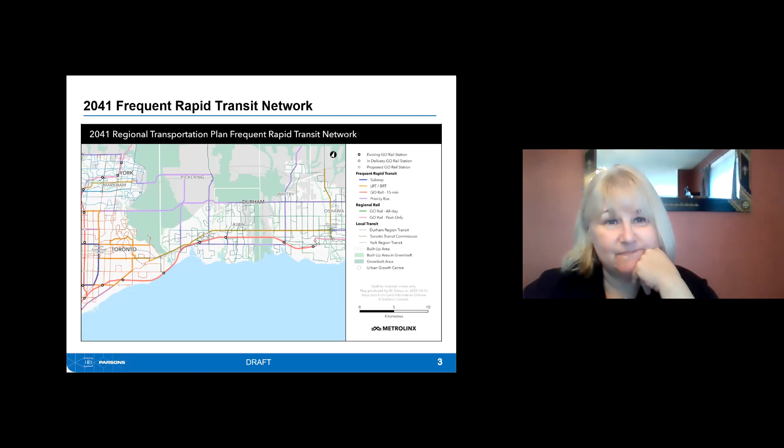This project is part of what is known as the 2041 Frequent Rapid Transit Network, which is part of Metrolinx's plan to provide a holistic solution to the entire region. There are a number of elements in the east part of the plan, including this particular project, the extension of the GO train planned out to Bowmanville, a future BRT or LRT corridor up Simcoe Street in Oshawa to serve the Technical University, and plans for higher order bus priority on Taunton Road and other north-south corridors. This is an integrated plan agreed to by all of the region, and Metrolinx is now taking it one piece at a time and moving it forward. This is one of the ones in the East End moving forward first.

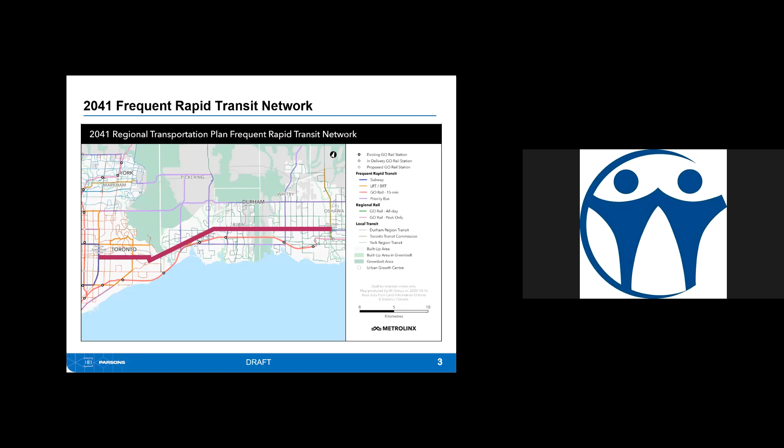We start at Scarborough Centre, connecting to the large employment node there, as well as to the future Scarborough subway and the SRT. Coming out Ellesmere Avenue past the University of Toronto Scarborough campus, and then out the Highway 2 corridor.

As we zoom in a little, we can see the reason we're doing this: this corridor connects downtown Oshawa, downtown Whitby, Pickering Village, downtown Pickering, as well as a number of educational institutions, major shopping centers, and some large retail, residential and office developments. So there is a lot of travel along this corridor where people could take transit if it were more available.

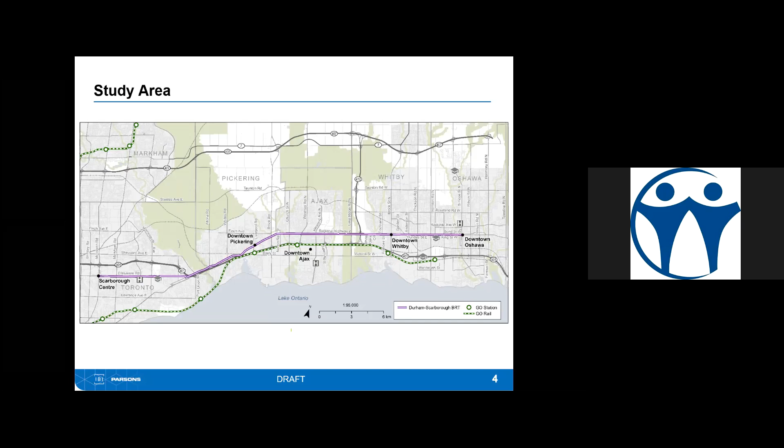We've also found that with the Durham Pulse service that's out there, we've seen a great uptick in ridership. The route today, the 900 service, which follows this corridor, is the most heavily traveled in Durham region today, carrying more than 3 million passengers a year. So we know there is the demand out here, and we're looking to improve the service to give people more options.

To give you a bit of an overview of the project - we were chatting about this before the presentation started - these projects take a long time to come from fruition to operation. This actually dates back as far as 2008 as part of Metrolinx's Big Move. Durham Pulse was launched in 2013 and has shown to be successful. Through 2017, 18, and 19, a number of other studies have come out that tie all of this work together with the master plans and official plans for each of the municipalities in the region.

We are now most of the way through our preliminary design process and working towards the environmental project, which I'll get to in just a second. After we have environmental approval at the end of the year, we'll then move forward into detailed design, procurement, and then into construction and delivery.

So we're a fair ways into this project, but there will be probably 6 to 10 years of construction. Not everywhere will be under construction for that full time - each area will likely be under construction for 1, possibly 2 seasons, but we'll start in different parts of the corridor and then fill in the key gaps and work to join the whole system together.

As an overview of the actual TPAP, or the Transit Project Assessment Process - the complicated provincial name for a class environmental assessment - it's divided into 2 phases. The first is the pre-planning, where we do all of our background studies, look at alternatives, go through most of our consultation, assess the impacts and mitigations, do our preliminary engineering, and draft up a report.

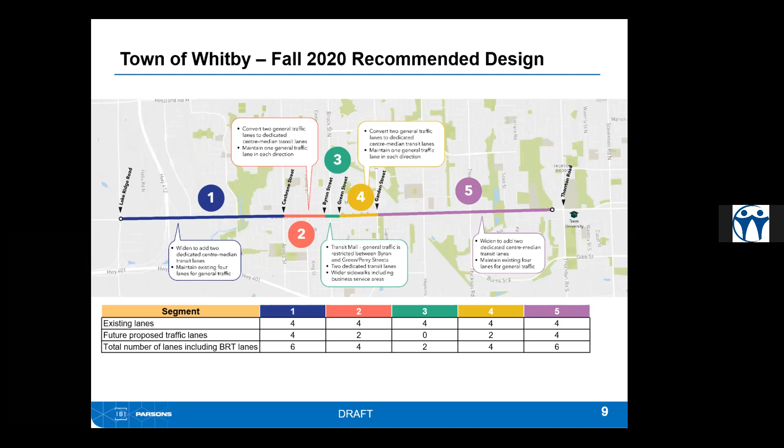East of Garden Street and out to the border, just west of Thornton, we're looking at ultimately widening the road from 4 lanes to 6 to put the BRT in the middle with 4 lanes of general traffic. There are a number of constraints to doing this. Obviously, the CP rail bridge is one of the big ones, and we are looking ultimately to replace that bridge. What that may mean is the section between Anderson and Garden is delayed further out in the process until we can get agreement with CP on how to replace that bridge. And then the downtown core in Zone 3 we'll get to a little bit further on in the presentation.

So coming down to street level and looking at what this would look like at Dundas and Fothergill, we see a 6-lane roadway. We have a central raised median with bus lanes on either side. Then we have 2 lanes of general traffic, both eastbound and westbound. And we also have sidewalks and cycling facilities on both sides of the road.

The intention in building the transit up is not just to facilitate people riding the bus, but to facilitate people getting to and from the bus. So we want to fill in any gaps that there are in the sidewalk network and in the cycling network to encourage active transportation around the transit system.

At the stops, we'll see in a minute, the design of the stops will be in these sections, will be out in the median of the road, much like they are on the Viva system along Highway 7 in York Region. And each stop will be accessed at a signalized intersection to make sure it's safe for people to get to and from the stops.

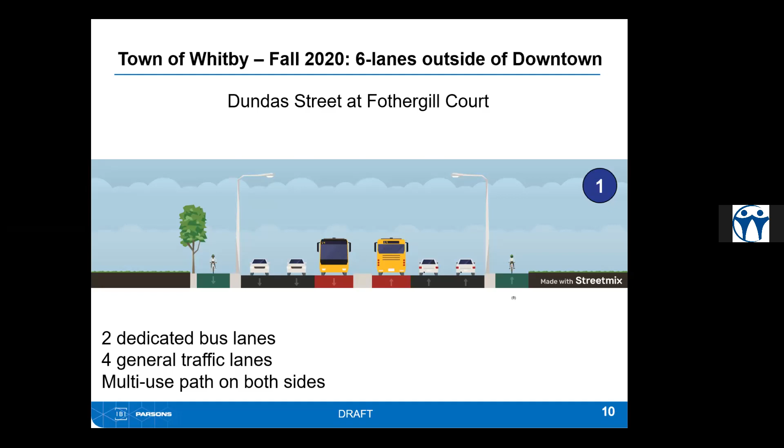As I mentioned, ultimately this is being recommended for the stretch of Dundas Street west of Annes/Cochrane and east of Garden Street. What we're doing here is making sure that we provide traffic capacity for the volumes that we're predicting for 2041. We are taking into account developments that are being planned nearby. We've looked at the official plan road right-of-way that's protected for. We're also looking at how we can minimize any impact on heritage resources and cultural heritage resources. So we have done a full suite of environmental studies, and we're taking those into account as our design moves forward.

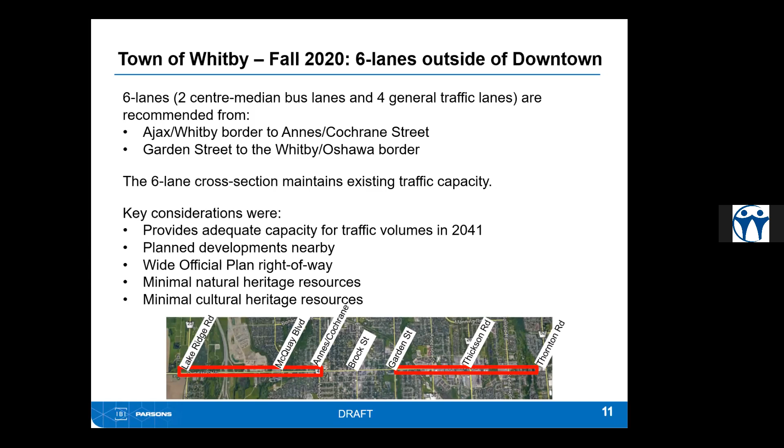The reason we're looking at 6 lanes in the outer area: if we start in the west end, today there's about 1,400 vehicles per hour in each direction during rush hour. A single lane of traffic can really only handle about 850 cars, so there are actually more cars out there than can be carried on a single lane of traffic. We also see that by 2041, with the growth in Durham Region, which is actually the highest of any region in the Greater Toronto Area, we expect that traffic will grow by more than 20%. That will be able to be carried on 2 lanes of traffic, but with only a single lane would lead to a lot of neighborhood infiltration.

With the dedicated bus facility all the way across the region, we're expecting that volumes will increase to somewhere between 1,600 and 1,800 per hour in each direction. That actually is equivalent to more than 1 lane of traffic and pretty close to 2 lanes of traffic, so it also allows for future growth. A BRT like this could handle upwards of 3,000 or 4,000 people an hour, so that does provide us with good capacity to gently change people's behavior to move more and more to public transit as growth happens and congestion increases.

Similarly, on the east side, we have a slightly lower traffic volume. It's in the 800 to 1,400 per hour range, and we see the transit usage will also be slightly lower, in the 1,000 to 1,500 passengers per hour per direction, but still more than can be carried in one lane of traffic.

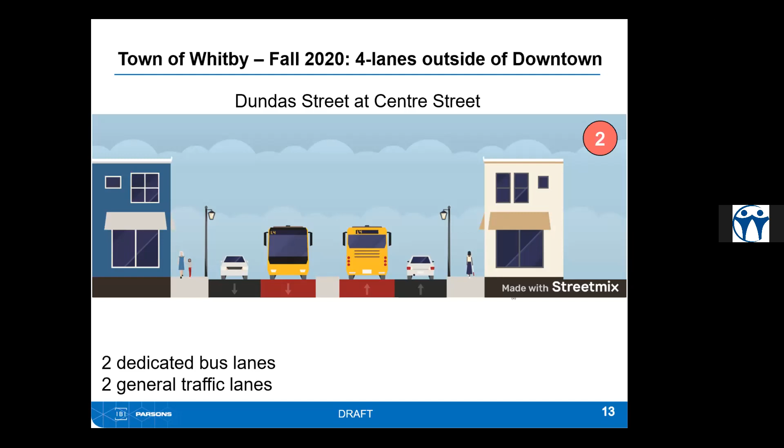As we get closer in and we have the older buildings close to the sidewalk, particularly the retail spaces, like we see here at Centre Street, the design is to maintain the existing curbs and repurpose the two median lanes for buses. We'd have to do some local widening where we have stops, for instance at Henry Street, at Euclid, and at Hickory, so we'd bump out slightly in those particular spots. Here again, the traffic volumes are slightly lower, and we believe the 4 lanes does provide good accessibility.

So the recommendation is to carry the 4-lane option from Cochrane as far east as Byron, and from Green Street as far east as Garden. The reason we can do this is there's a regular grid street pattern in the historic downtown, which is one of the most excellent ways to move people around. In fact, cities with regular grids of streets, like downtown Whitby, see far less traffic congestion than cities like Boston, where the streets are on a much more curvilinear pattern.

There's also a fairly narrow road right of way, so the impact of widening to 6 lanes would not be acceptable to the local community. A number of buildings are very close to the property line, and as we get closer to downtown, there are more cultural heritage resources that we need to protect.

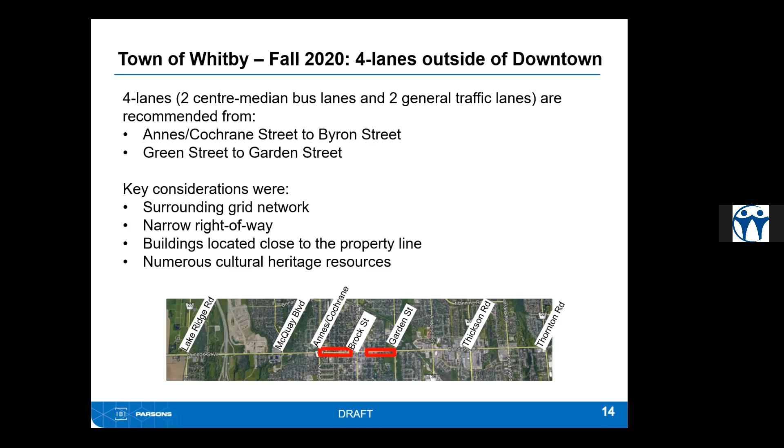Now, one of the things we realize is that by introducing BRT and having a median down the middle of the road, that will change the way people travel. So like you may have seen on Highway 7, the intent here is to consolidate turns—people needing to turn in and out of local side streets and driveways would be reduced to right-in, right-out only.

If you're coming westbound, instead of turning left into the local side street, you would go to the next traffic signal and be allowed to make a U-turn along with a left turn phase on a dedicated phase, to come around and back into the driveway. Similarly, if coming eastbound and into that side street, you could turn out, go to the next intersection, make a U-turn and head back.

So this is actually in alignment with Vision Zero. Where we look at widening roads to 6 lanes, we're looking at introducing a median regardless of whether there are BRT lanes, just to improve safety. Our traffic analysis has taken into account that we'll see extra volumes making the left turns and U-turns at these intersections, and we believe that all works.

This will also require large trucks to change their routes, so that will be communicated out to the trucking industry and included in online tools like Google Maps, so people know where they can go. We do know that ambulances and smaller trucks will still be able to make the U-turn. It's only when we get to large tractor trailers that they won't be able to, and they'll have to find a different route to service businesses.

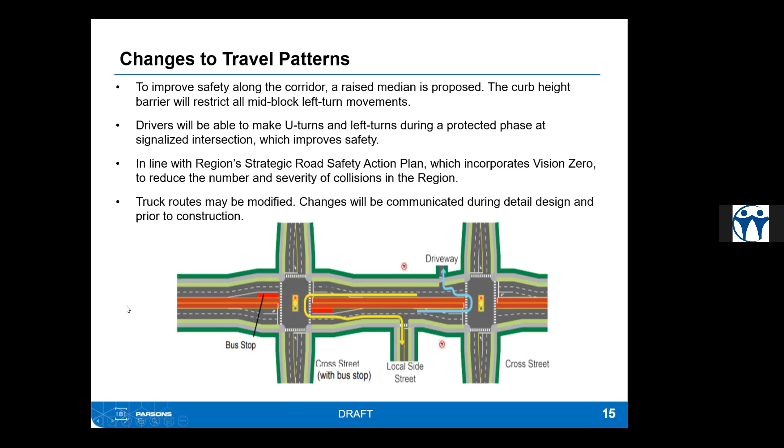So I wanted to show this video prepared by York Region Rapid Transit, to show people how the buses, the traffic, and the pedestrians function. I'm just going to click on the link here and we'll run this short video to see how that functions.

And it'll just pop up here in a second, I hope. Here we go.

Just takes a minute to load here. We found on York Region that this is very safe for pedestrians. They always cross at signalized intersections.

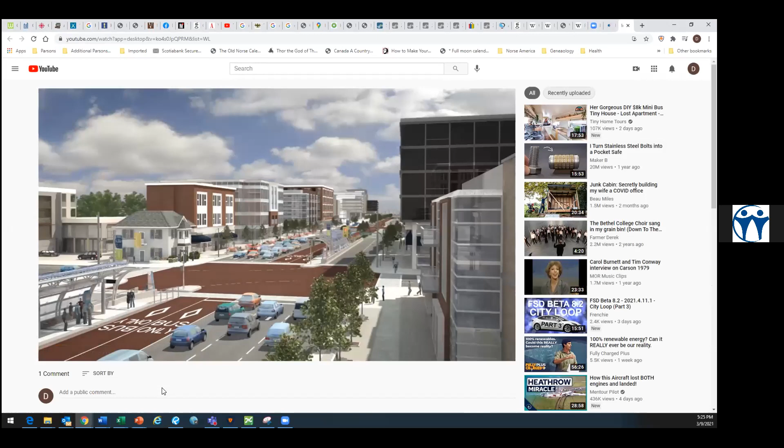You can see here the left turning traffic, left turn and U-turns get a green phase while the buses are stopped. Once the U-turn and left turn traffic is cleared, we then see a green light for the eastbound and westbound traffic along with the buses.

The buses will stop at the far side stop for boarding and alighting of passengers at a dedicated facility with off-board fare collection and amenities for passengers waiting. That helps speed up the boarding and alighting process. It also allows the buses to move forward once they've done all their boarding and alighting without having to wait for the light.

When the light changes, pedestrians will cross to and from the island to get to the bus stop or to come from the bus. There's also a refuge in the middle of the road so that if people need more time to cross the street, they can cross in two stages. There'll also be a push button there to call your pedestrian walk signal.

So this has been very successful in terms of making it a very easy way to get around and to use the system.

There is a timely question, so I thought I would introduce it. It's from Brian Ruck. The question is, how will the conflicts between U-turns and right turns be handled, as this is often a significant collision concern at these types of intersections?

That's a good question. We are making sure that in a lot of the areas we have two receiving lanes, so you should be able to make the U-turn into the inside lane, and the right turning cars would use the outside lane. We will be looking to make sure that's also a behavior that is learned quite quickly. We found on Highway 7 that people understand the left turns because they've seen signs. We may also look at putting some right turn restrictions, no right turn on red, if we find there are either visibility issues or a particular safety issue that arises. But we've found ways to manage it on the other system.

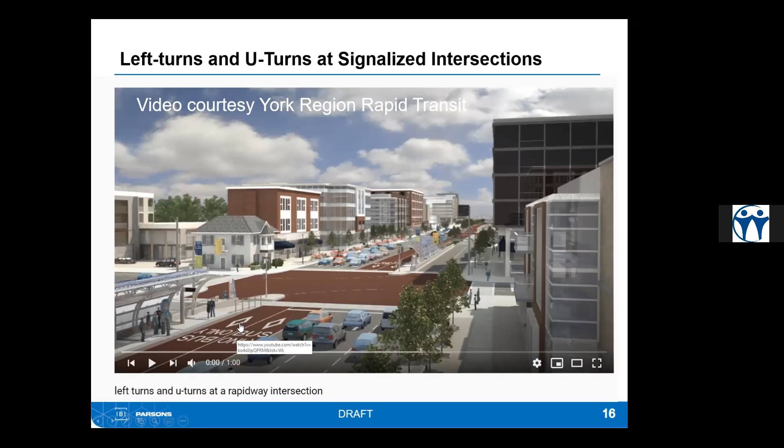As I mentioned off the top, one of the reasons we're looking at this corridor is there is a lot of growth planned. There are a number of dedicated, designated future growth areas in the three downtowns. Pickering has been working on a new downtown plan as well, centered around the route. So not only is there a development plan, but there's all kinds of development.

This allows people to both live and work in the corridor. People can connect from north-south bus routes and make good connections at all the stops to continue their journey along the corridor. We see great potential with this service to increase the number of transit-oriented developments, and make sure we can handle everybody who wants to live, work, and play in this community.

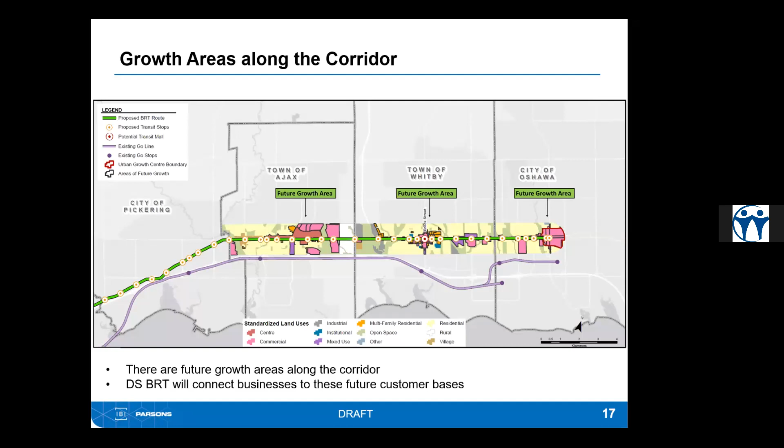Some of the concerns we've heard are about the right in, right out access and the walkability of a six-lane roadway. We do have to remove some trees to build this, and there is a tree compensation plan planned as part of this. We've taken opportunities to improve active transportation to heart, and not only is this entire service fully accessible, but the intent is to fill in all the gaps in the sidewalk and cycling networks.

We are looking to increase business accessibility for employees in particular by giving them more opportunities to come by transit, as well as people coming to your businesses. We see that the service does provide the opportunity to bring more people and more business along the corridor.

We have been discussing with CP Rail about replacing the bridge so that we can get the six lanes in, and they have agreed that they will work with us to do this. This will provide space to fill in another gap, which right now is a very narrow sidewalk that follows underneath the CP Rail corridor, so we will be able to have both sidewalks and cycling facilities through there.

So I think before we jump into the downtown section, I want to turn it back to Glenn, or to Natalie, and see if there are any questions about the outside of the downtown area that we can address before we move on.

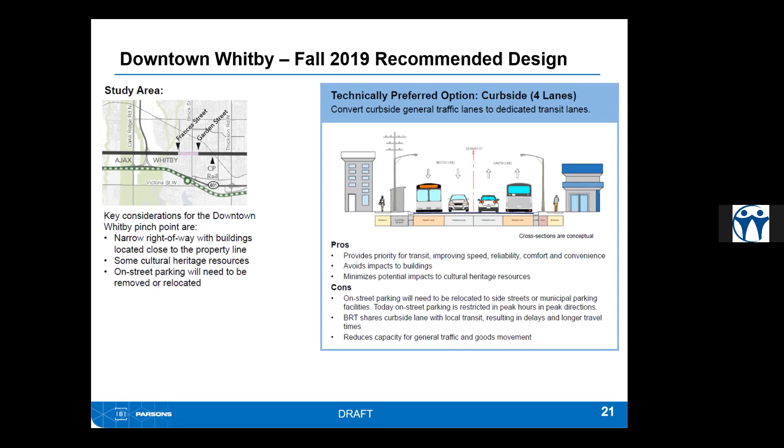The challenge with this, though, is that on-street parking would need to be relocated. There would be a challenge with deliveries, particularly in the peak hours, because there would be no access to the curb, so deliveries would have to happen from side streets or from rear accesses. And with the buses being in the right-hand lane, any turns in and out of driveways and local side streets or left turns across introduces conflicting traffic with the buses, which takes away some of the reliability.

So what we heard was there were concerns about the on-street parking being moved. There were concerns about general traffic impacts. There was concern about the ridership and whether there were enough riders to justify it. And there was a major concern about there not being any improvements to the streetscape downtown.

So some suggestions that we took back were to look at considering one-way traffic through downtown. We looked at a number of different options for that. We looked at where we could find space for wider sidewalks and additional pedestrian crossings. And we also went as far as looking at whether or not in the downtown we could go to a transit and pedestrian mall where there would be no general traffic, but only transit and pedestrians.

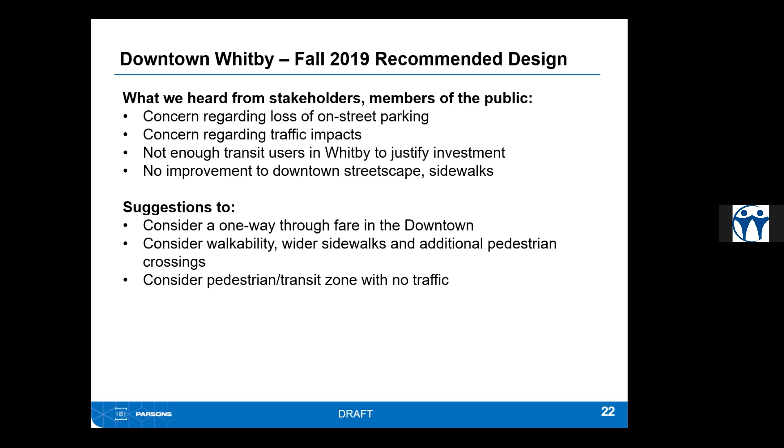So that was the design we came forward with last fall. The idea here was to convert the 2 curb lanes to wider sidewalks, so we would more than double the width of the sidewalks, and we would leave the 2 center lanes for BRT.

We see that this will see a good uptake in ridership. Today, there are about 900 people who board and alight per day through the central area, and about 900 people per hour riding the bus eastbound and westbound. In 2041, we see those numbers will double to around 1,500 to 1,800 boardings and alightings, and about 1,500 people per hour in each direction. So we see a pretty healthy increase in ridership as we move through here.

We proposed this to run on Dundas from Byron to Perry Street, with about 1 block on either side of Brock where we would have this facility. That also allows us to integrate the stop for westbound on the west side of Brock and eastbound on the east side of Brock into this wider pedestrian realm.

There was also a benefit that with the wider sidewalks, they could be graded slightly differently, so we might be able to ramp up to the doors of businesses to help improve accessibility and get rid of the steps at the doors. That's a challenge today because any ramp sticks too far out into the sidewalk.

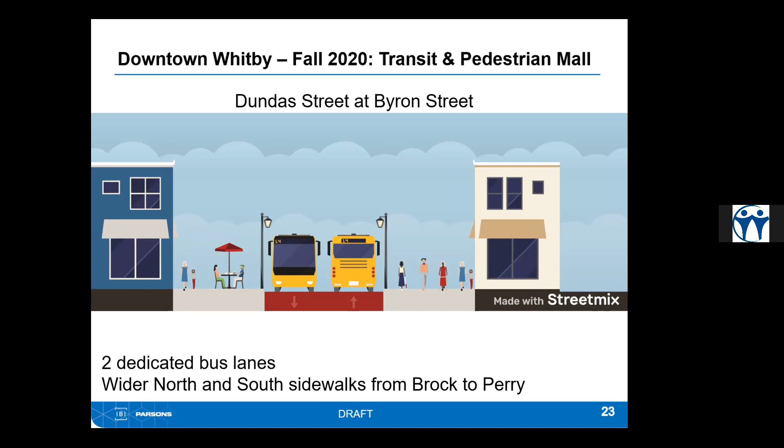So potentially this is what it could look like. We see the sidewalk has been widened significantly, with the potential for patio dining and a lot more activity. We also see the opportunity in set locations to allow delivery vehicles to come in and pull up onto the wider sidewalk, particularly in off-peak hours, to service the local businesses.

So while we would lose the on-street parking, it would be relocated very nearby. We found a spot at Elm and Byron where we can replace almost all of the parking. We would still allow deliveries, and of course emergency vehicles would also be allowed to come through here to get across the downtown area. So we felt this was a good balance.

It provides a high degree of transit priority, a much improved pedestrian realm on both sides of the street, and there are ways for traffic to get around the area and still serve the businesses.

So when we first brought this forward, there was concern about some of the impact on the businesses, the loss of parking, the potential for neighborhood traffic infiltration, again with the number of riders being there. And would this help improve the character of downtown, or would it be detrimental?

So we looked at some suggestions we got about relocating parking, allowing some general traffic to come through to at least provide some eyesight on the business frontages for people in their cars, and how we would work with the businesses during design and construction, and developing some traffic management plans during construction. So we came up with some good ideas I'm going to show you now.

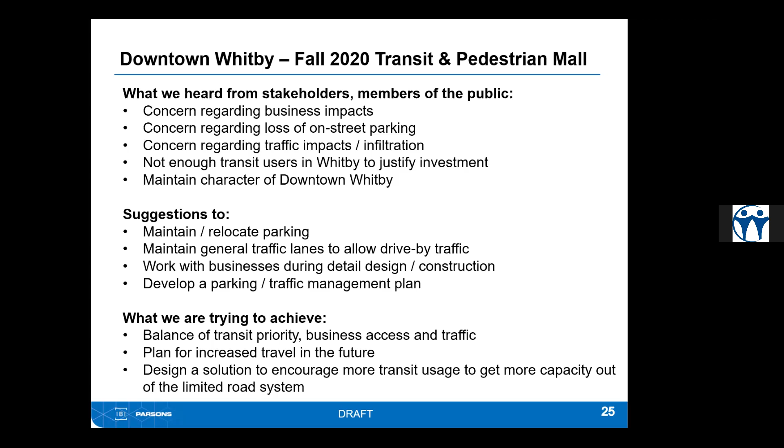So in the refined design, it's somewhat similar in that we would see the sidewalk widened on the north side between Brock and Byron only. On the south side, we would reinstate the single eastbound traffic lane, so cars driving eastbound would still be able to go through and have access to the businesses. There's still no on-street parking; that would still be relocated, as we had talked about before.

There are still some challenges with deliveries. There would be the possibility of a dedicated space on the north side for deliveries, but with a single lane of traffic on the south side, deliveries could still be a bit of a challenge.

What this does allow for is some traffic through here. It also reduces the infiltration of traffic into the local neighborhood, particularly for eastbound. You might be asking why we would reinstate the eastbound lane and not the westbound lane. The answer is twofold. Number one, the traffic volume eastbound in the evening is higher than the traffic westbound in the morning.

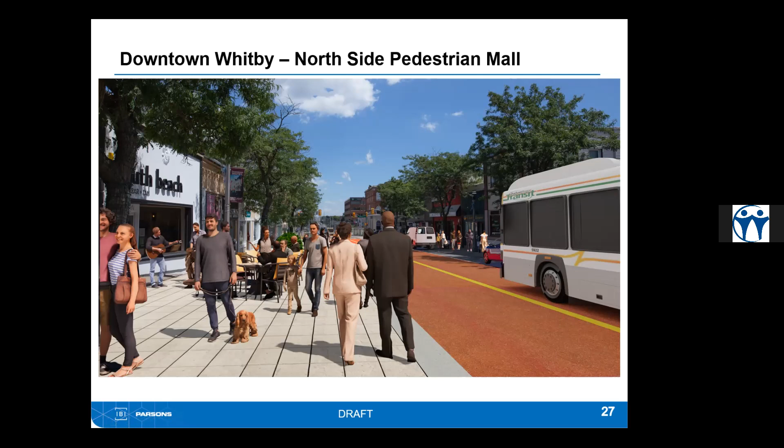So what would happen in this case is the westbound traffic would come through and turn right. There would be an opportunity to make an unsignalized left-hand turn at Elm for people moving to this enlarged parking lot we're proposing behind the businesses. If that's busy, or that time of day the left turn is challenging, you would proceed north to Mary, where we would extend the left turn lane, turn left on Mary. We would install a new traffic light at Mary and Byron to bring people back down, and then turn right again onto Dundas Street. So it's a 2-block detour.

Eastbound, there would be a through lane all the way across, so we wouldn't see nearly the amount of traffic infiltration, particularly on the south side. We believe this detour will manage a good chunk of the detour traffic headed westbound.

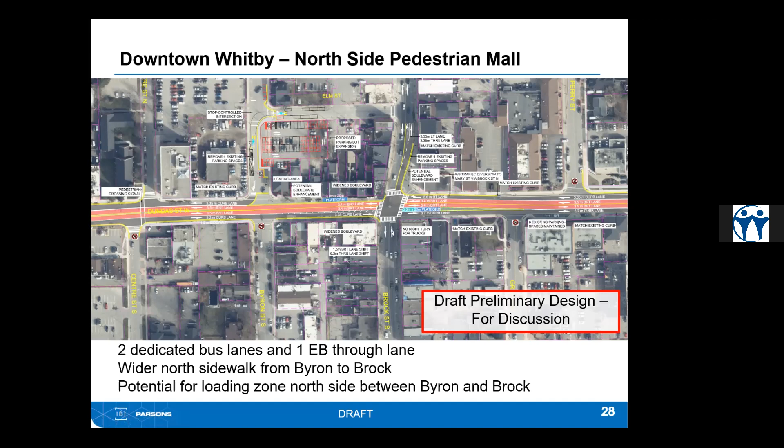Addressing the comments we've seen, we believe that we can replace all of the parking within 75 to 250 meters of their original location. That's only a 1 to 3 minute walk, and we want to encourage more active transportation in the downtown.

Having drive-by traffic eastbound was seen as critical to business success, to have eyes on the storefronts. So providing the eastbound lane does that. It also provides for less traffic infiltration for eastbound traffic, and the improvements we've made for westbound will limit traffic infiltration for westbound.

It does maintain access for deliveries. Some of the spots might be a little bit challenging, particularly in peak periods, but it does maintain access for deliveries. It does create a good public realm in the northwest quadrant on the north side of the street between Brock and Byron, and would serve as a model to extend that further if desired. It would improve accessibility into the buildings in that quadrant, because there would be enough space to introduce ramps into the door fronts.

And this still maintains all of the cultural heritage features because we're still staying within the curb line of the existing road.

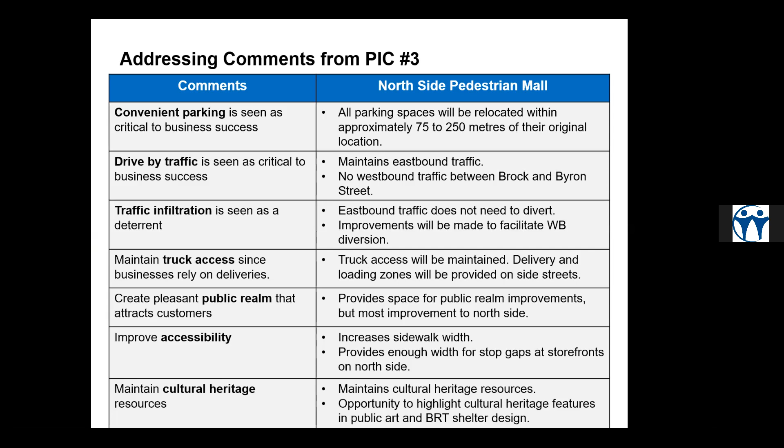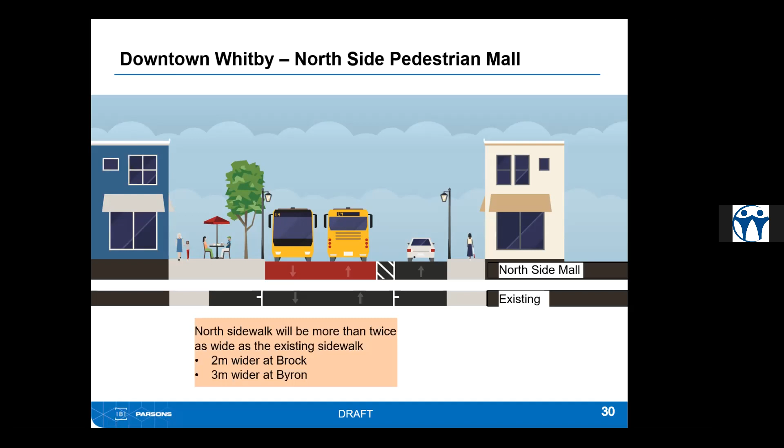In terms of the issue of traffic infiltration, we've done some fairly extensive work. What we're seeing is that of the traffic on Dundas Street today, about 20% of it is actually going all the way across without stopping in Whitby. So it's cars that start in Oshawa or further east and go to Ajax and further west and don't actually stop in the downtown. There are other cars coming in from the east that go into the road network, and then people within Whitby come out of local communities and get back onto Dundas Street. So it looks equally busy all the way across, but it's actually different cars at the east end of town than at the west end of town.

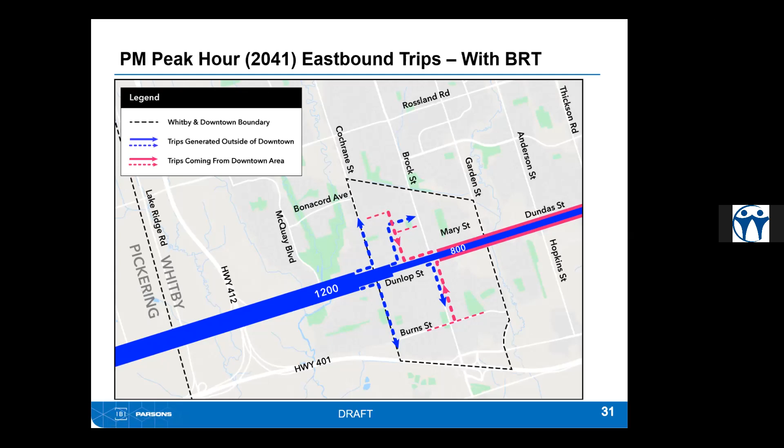This analysis was done based on information we collected from a company called Streetlight, which is anonymized cell phone data. We looked at movements from February 2019 to January 2020, pre-pandemic, and the AM and PM peak hour Monday to Thursday, giving us a good sense of the heaviest times of day. This information shows routes through the network, but does not show us the beginning or end of each trip. That's all stripped away, and there's no way to reverse engineer this data to follow any one particular car. If the same car is making multiple trips, like a morning trip and an afternoon trip every day, they're not linked together, so there's actually no way to see if somebody is making the same trip over and over.

What we found, as I mentioned, is 20% of the trips are going all the way straight through. We believe that as congestion starts to grow, those trips will find other routes like Rossland and Taunton, or down to the 401, to bypass downtown Whitby.

There's about a third of the trips, or 34%, that begin or end in the downtown area. So those trips are already making most of their trip on local side streets and only a portion of it on Dundas Street. So the portion on Dundas may change with them moving and continuing their trip on local streets.

The balance of the trips, or about 46%, are medium distance trips, but they're entirely within the town of Whitby. So for instance, that's somebody who lives in the Northwest and happens to need to go down to a job in the Southeast, or lives in the Southwest and is going up to visit somebody in the Northeast.

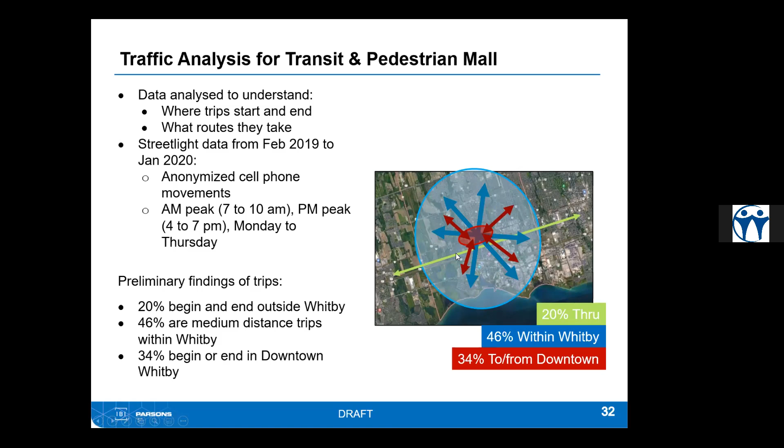One of the questions we've been asked is, what does this do to the capacity of the roadway? In this new design, on the top side, we're planning to carry about 1,500 per hour on the buses by 2041. As I noted, that's only about half of the ultimate capacity for the transit service. We can carry about 850 cars in the eastbound lane. If the full mall were introduced, either in the short term or longer term, those 850 cars need to find an alternate route, and we would be carrying the 1,500 people on the buses by 2041. And of course, we have about the same number of pedestrians in both scenarios.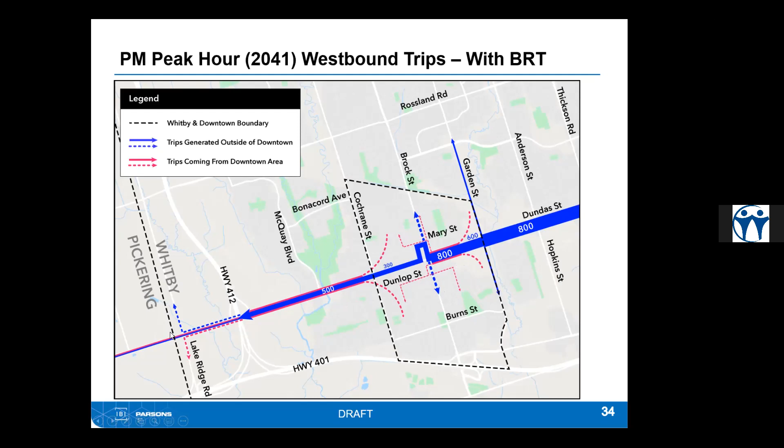So that's the impact on traffic, but what is the actual impact on transit? We looked at the travel times from end to end, from downtown Oshawa to Scarborough Centre, and what we're finding is on any one particular portion of it, the benefits are proportional. Today that takes about 50 minutes to drive, but it takes about 100 minutes on the bus, so the bus trip is at least twice as long as the car trip.

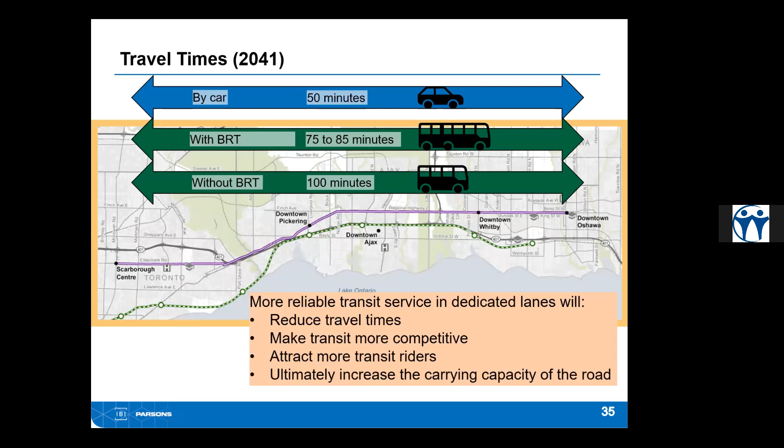With BRT in place and having the priority, less friction on the buses and a more reliable service, we get down to a 75 to 85 minute trip. That's actually quite a significant decrease, which will make transit much more competitive and attract a lot more riders to the system, and ultimately increase the capacity of the road to carry people.

As I noted, in 2018 we had about 900 people getting on and off in the downtown area, 900 riders per hour at Brock, about 5,400 a day. By 2041, our predictions are seeing 1,500 boardings and alightings, and 1,500 per hour going through, for about 9,000 people. Along the entire corridor, we're seeing 6,400 riders just in the peak hour, and more than 38,000 riders per day. So part of the benefit of providing priority all the way along the corridor is, if there are delays here in Whitby, they work their way all the way along and slow down everybody all the way along the corridor.

So what are we going to do to help communicate as we move forward into design and construction? Metrolinx has community relations and communications specialists that will be helping to form committees to look at this. We will have a community office out there during construction to address issues, a 24-hour phone line, regular stakeholder meetings. We'll have these construction liaison committees to help address issues proactively. We'll be working with groups like the Chamber and the BIA, as well as others, to look at marketing and other campaigns, signage and wayfinding, as well as traffic routing, to make sure communities are impacted as little as possible. We do know that construction is challenging, so there will be impacts for sure, but we're looking at what we can do to mitigate those.

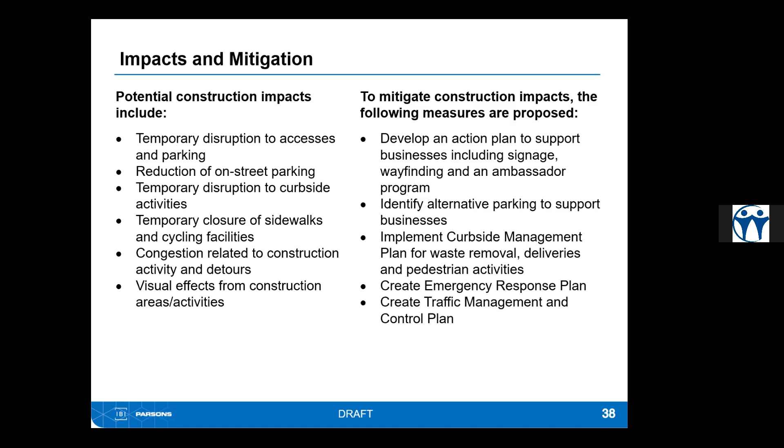So Glenn, that's sort of the end of the presentation. I'm going to turn it back over to you to either see if there are more questions or walk us into the AIM exercise.

Great. Thanks very much, David, for the comprehensive overview presentation, much appreciated. So yeah, the Metrolinx team would love to get your thoughts on the design and any feedback you want to share with them.

But before we go there, let's quickly check in with Natalie and see if there are any questions of fact or clarification, or if there's anything that our attendees would like the team to further explain or make more understandable. Natalie, has anything come in? Are there any further questions at this point?

David, is there anything you want to add about the frequency of vehicles, the busyness of the streets? So in terms of service frequency on the BRT, we're looking at least a 5-minute service in the AM and PM peak, slightly less frequently in the midday and the evenings. But we also expect, as ridership grows, we could start to see buses every 2 or 3 minutes when we get out beyond 2041.